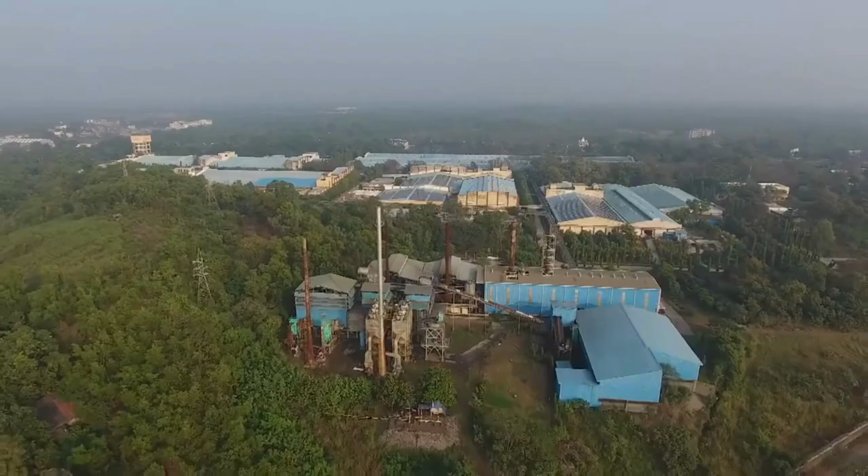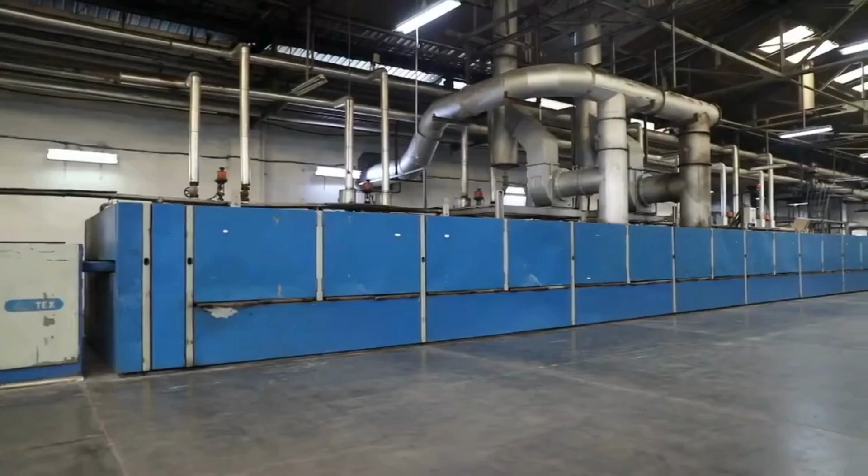The Perform, Achieve and Trade (PAT) scheme has been launched by Bureau of Energy Efficiency, Government of India, to build synergies between the stakeholders among energy-intensive industries in India in order to make them more energy efficient. Today, we will learn more about the latest innovation for waste heat recovery through stenter machine for the textile industry.

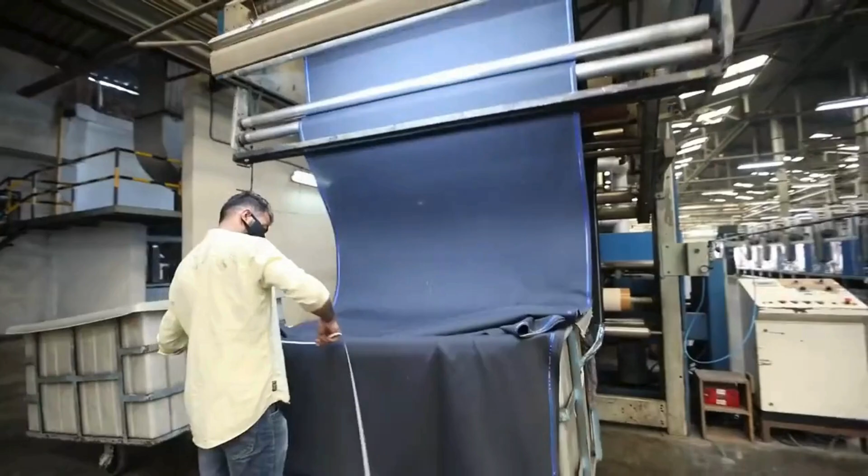A stenter is a machine or apparatus for stretching or stentering fabrics. The purpose of the stenter machine is to bring the length and width of fabric to predetermined dimensions and also for heat setting. But this process also provides for two opportunities for energy saving in convection drying process and the process of fabric width control.

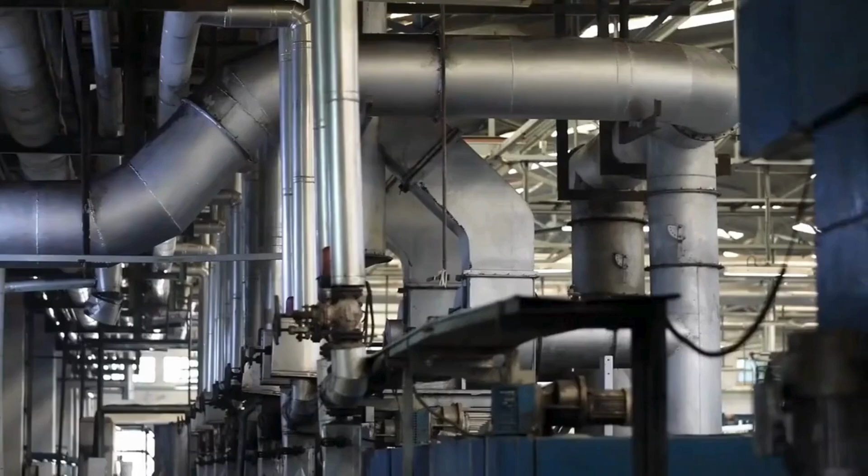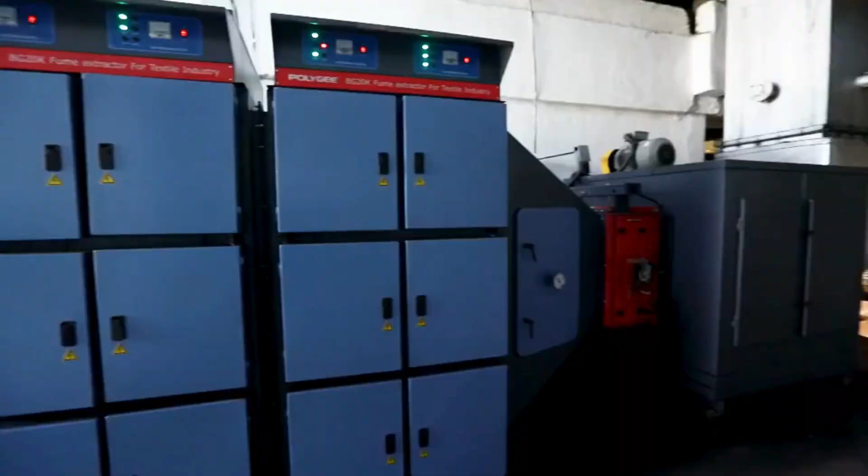In the process of convection drying, high velocity hot air is circulated, and to avoid the buildup of excessive humidity, exhaust fans continuously remove this extra air, which then becomes the major source of waste heat. Using the new technology, stenters with thermic fluid heaters can recover this heat in order to reduce the operating cost by keeping the exhaust temperature high, thus resulting in substantial energy savings.

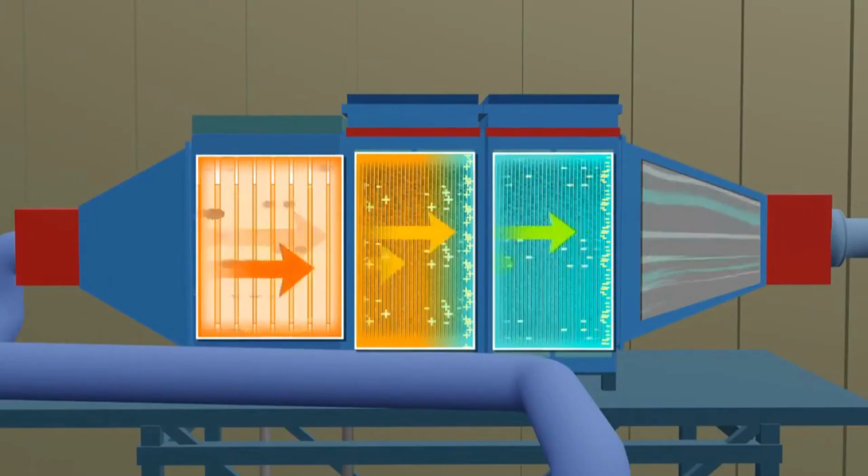With exhaust air to water heat recovery system, this waste heat is extracted and is utilized in the nearby process machines as hot water. Not only this, the recovered oil is also recycled and reused by authorized pollution control board vendors, thus making the incorporation of this new technology doubly profitable.

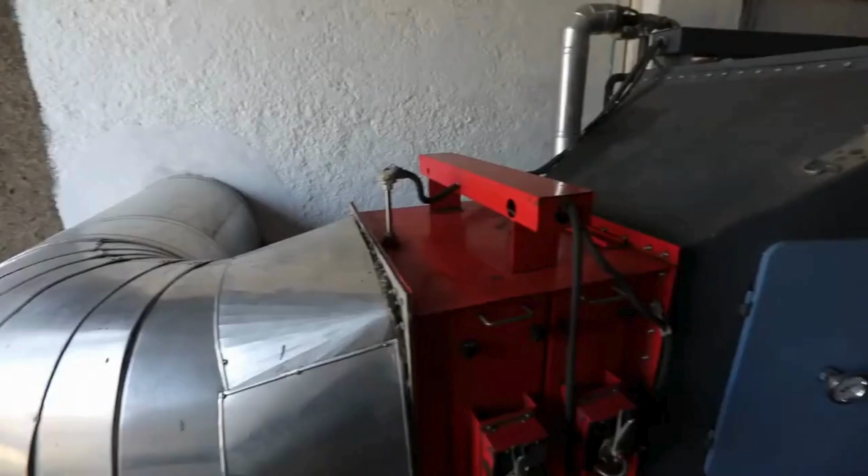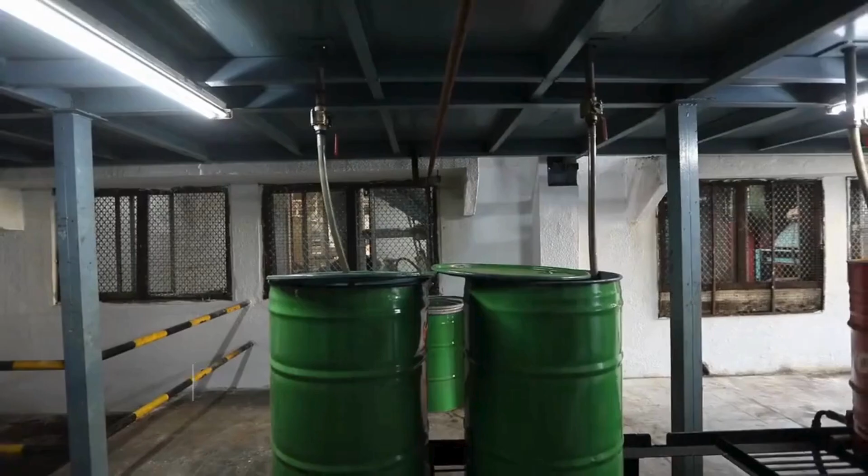By using this technology, significant savings of about 4.5 TPD steam have been achieved, which have resulted in about Rs 21 lakhs worth of cost saving from steam annually and oil recoveries of 80 litres per day, resulting in annual savings of Rs 10 lakhs have been achieved in the implementing partner plant.

Not only that, the utilization of condensation of oil vapor from PV material stenter vapor has also helped to make the process greener by reducing the emissions and making the air cleaner. These results are encouraging the officials as well as other plant owners to consider implementing the air-to-water exchanger method on a larger scale.

Previously, in the stenter machine, the hot air was going into the atmosphere and we were losing on the heat. So, what this machine has done is to extract the heat from the air which is coming from the stenter and heat the water which is used in the process.

Secondly, the oil droplets which are coming from the process, previously they were going through the atmosphere. Now, the electrostatic precipitator in this machine extracts the oil from the air and collects it into the drum. This is now recycled to the recycler of GPCB. And the fresh air without oil is going into the atmosphere.